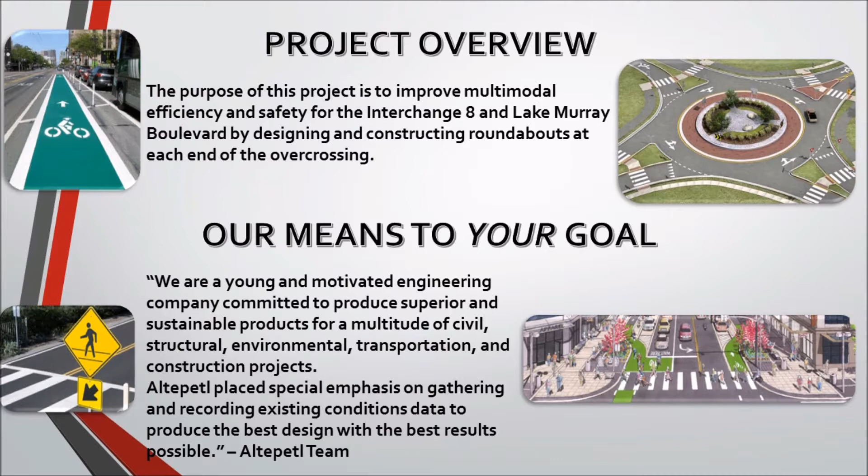The objective of this project, as stated in the request for proposal, was to improve multimodal efficiency and safety for the Interstate 8 and Lake Murray Boulevard interchange and the adjacent roadways by designing and constructing roundabouts at each end of the bridge. It was also to reconfigure the geometry of the approaches and departures of the adjacent roadways.

The Altepetl team prides itself on having one of the most experienced groups of individuals that one can find at this level. These individuals are Joshua Woodruff, our transportation engineer and resident CAD wizard, Michael Singley, who tackled the project's hydraulics and hydrology matters, David Fish, myself. Not only did I act as the project manager, I also took on all of the structural and geotechnical engineering needs of the project. Daniel Connor handled the scheduling and construction phasing of the project.

Leonardo Flores provided the traffic analysis and determined the feasibility of our various alternatives. And Corey Sabota took on the environmental concerns introduced by the project. Now that you know a little bit about who we are, I'll let each one of these guys tell you about how they took on the different aspects of the project.

Hello, my name is Joshua Woodruff, the roadway design engineer and CAD specialist. The existing site shown here is located off Interstate 8 in La Mesa at the 70th Street, Lake Murray Boulevard exit. The site includes 3 intersections, 2 of which are signal controlled and 1 is stop controlled.

The 70th Street Alvarado Road and the Lake Murray Boulevard Connecticut Avenue intersections are signal controlled. The stop controlled intersection is located on Parkway Drive at the I-8 West on-ramp off-ramp. There are no bicycle paths located on the site, and pedestrian crossings are long and unsafe.

The existing traffic conditions that contributed to the geometric design will be discussed by the transportation engineer. As the roadway design engineer, I work directly with the transportation, structural, geotechnical, hydraulics, and environmental engineers to produce a fluid and appropriate geometric design. This design had to improve vehicle flow and pedestrian and bicycle safety to create a complete design.

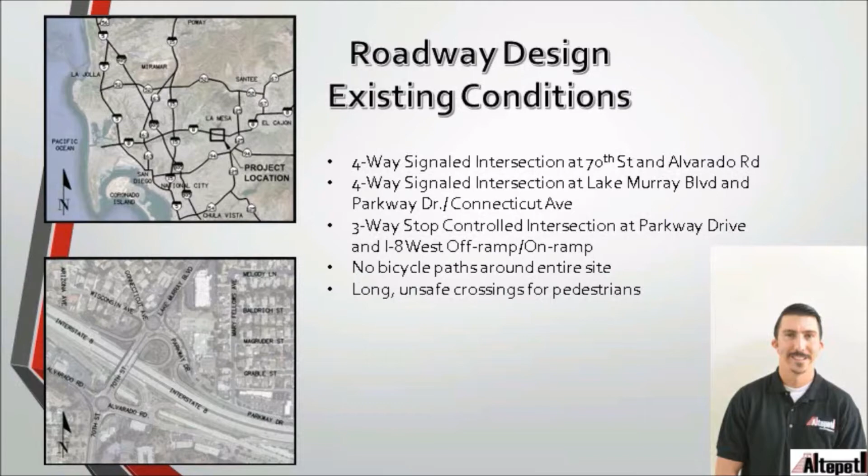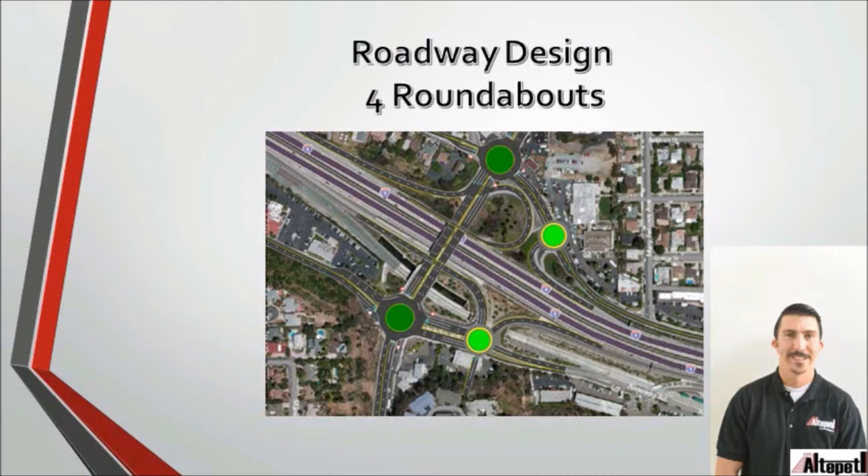A couple designs were analyzed before the current design was used. A prior design entailed 4 roundabouts as shown in this picture. This design wasn't used because the site lacked enough space to design without major grading or the use of retaining walls.

Another alternative design was having a diverging diamond interchange on the bridge between the 2 roundabouts. This is a schematic drawing of the design with the diverging diamond interchange. This design wasn't feasible due to the length of queue and the space needed between the roundabouts.

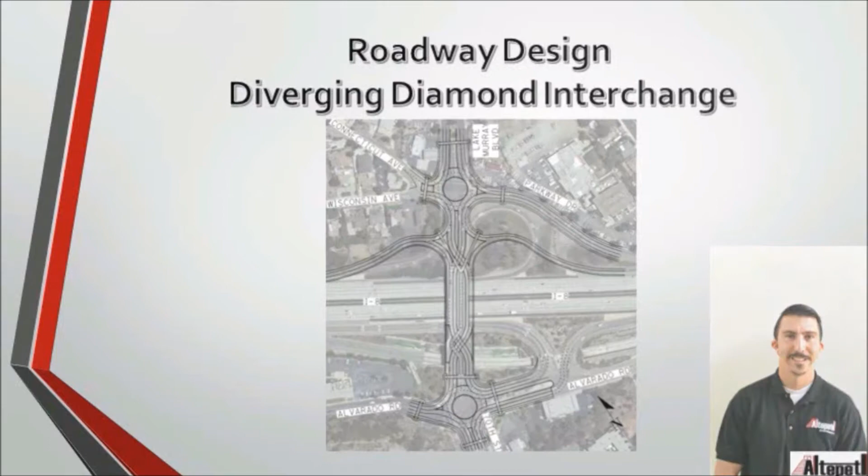To meet the needs of the current and projected vehicular traffic, a 2-lane, 180-foot inscribed circle diameter roundabout was created for the 70th Street, Alvarado Road, and Lake Murray Boulevard Parkway Drive intersections. The lanes inside the roundabout are 15 feet wide, and a WB-67 interstate semi-trailer was used as a design vehicle with a minimum design radius of 45 feet.

A 10-foot concrete truck apron with a rolled curb was added to the island of the roundabout to accommodate the sweep path of the design vehicle. The rolled curb was used to transition to the pavement to prevent the use of daily traffic.

On the southern roundabout, designated right turn lanes were used to accommodate heavy traffic. The stop-controlled intersection on Parkway Drive was replaced with a signal-controlled intersection to improve traffic flow.

Another priority for this site was to create pedestrian and cyclist safety. ADA accessible crosswalks with flashing markers were added to each roundabout. A new 8-foot, 2-way, green-painted bicycle path was added to the west side of the bridge. All lanes on the bridge are 11 feet wide and will be used to slow vehicles down and create a safer environment for the pedestrians and cyclists.

To accommodate the size of the roundabouts, the Shell gas station and the truck and SUV center north of the northern roundabout will need to be purchased. Also, part of the Alvarado Parkway Institute parking lot will need to be purchased for the proposed Parkway Drive alignment.

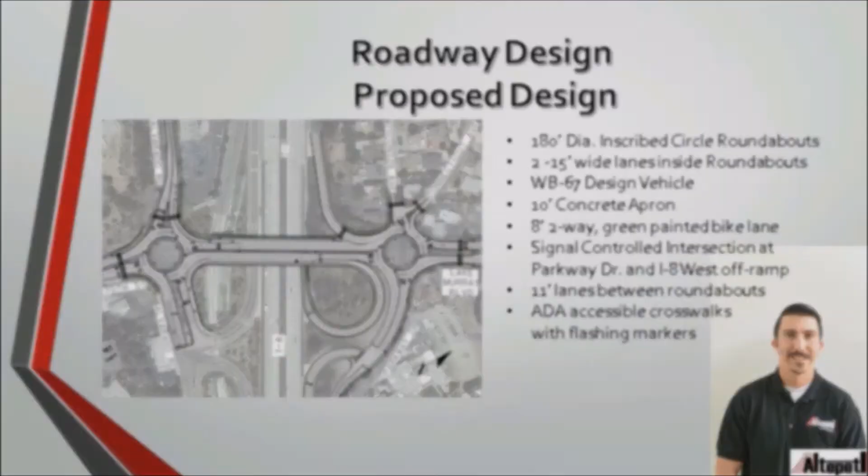My name is Leonardo Flores, the transportation engineer and traffic analyst for this project, and I'll be discussing our traffic analysis findings. In order to produce accurate results, our team of specialists performed traffic counts and lane measurements. The data gathered was used for the baseline volume movements and existing network conditions.

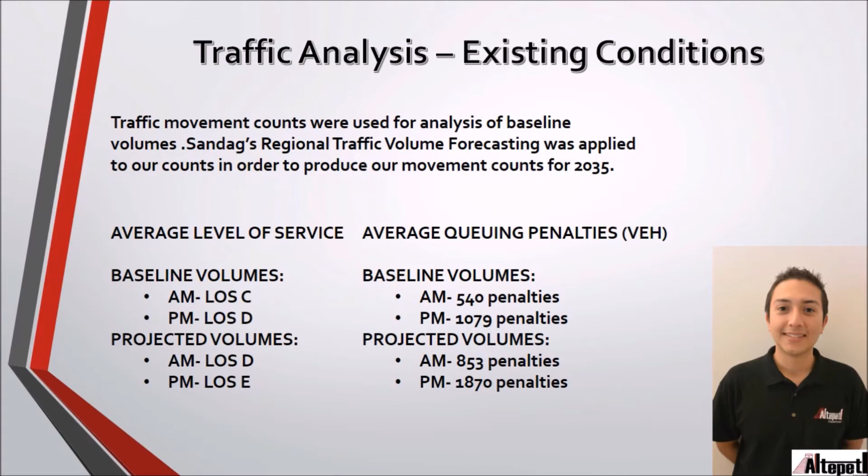Our projected results are based off SANDAG's regional traffic forecasting for the year 2035. As seen on the slide, the existing conditions demonstrated that the worst-case scenario was during the PM peak hour. Our calculations show an average LOS of D for the baseline volumes and an LOS of E for the predicted volumes. As far as queuing, PM peak continues to be the worst-case scenario with over 1,000 vehicle penalties for the baseline and projected volumes. The video being shown is a short simulation of the existing conditions during the worst-case scenario.

As mentioned by Joshua Woodruff, several designs were tested in order to identify the most appropriate design. The chosen design consisted of two roundabouts and a new signalized intersection. The design showed a significant improvement over the existing conditions.

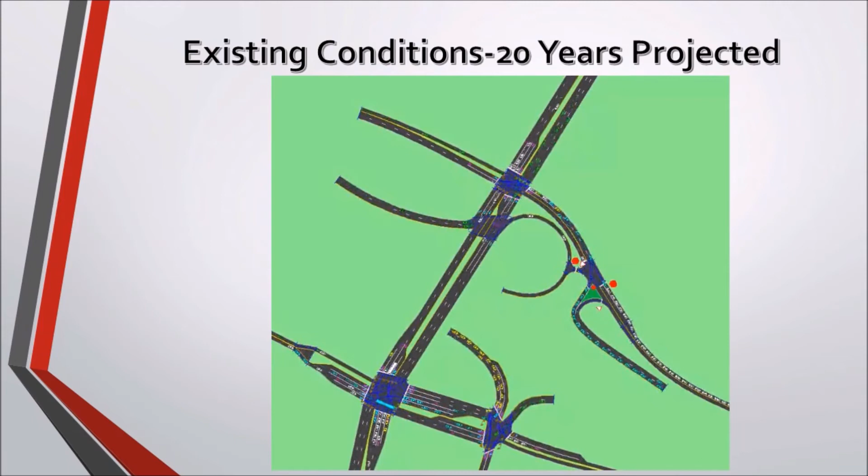As seen on the slide, the proposed conditions demonstrated that the worst-case scenario was during the AM peak hour. Our calculations show an average LOS of B for the baseline volumes and an LOS of C for the projected volumes. As far as queuing, the PM peak becomes the worst-case scenario with 4 and 28 vehicle penalties for the baseline and projected volumes, respectively.

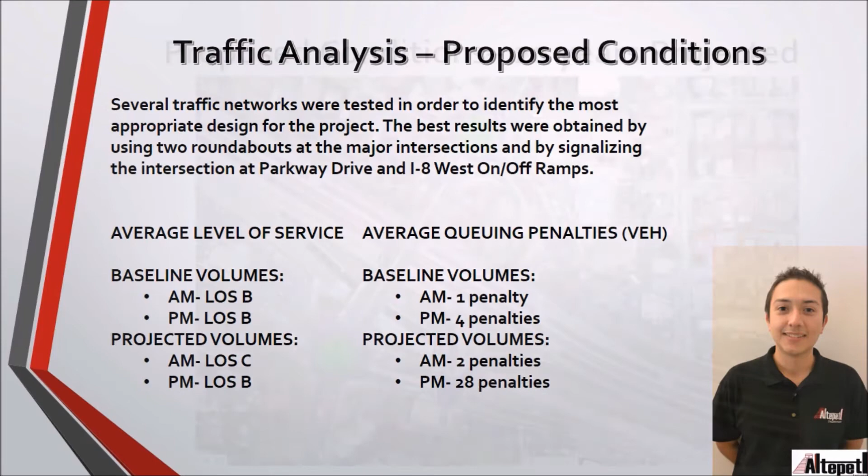The video being shown is a short simulation of the proposed conditions during the worst-case scenario, in which the positive results become apparent.

Meeting the project's objectives of increasing both multimodal efficiency and safety required a new overcrossing structure. There are several differences between these two structures as shown here in this comparison. The structural depth was reduced to 4 feet in order to maintain the existing deck elevations while meeting the HDM standard of 16.5 feet of vertical clearance.

The new structure is a 4-span continuous pre-stressed cast-in-place box girder bridge, as opposed to the steel girder simple span bridge that exists today. The new Lake Murray Boulevard and 70th Street overcrossing is 28 feet wider than its predecessor in order to meet the current and future traffic needs, as well as enable us to introduce complete street concepts.

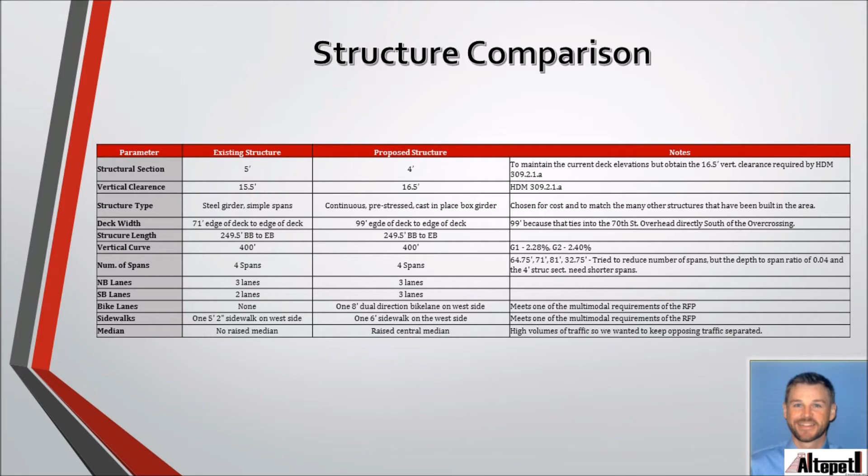As depicted here, the overcrossing will be constructed in 2 stages and have a 5.5-foot closure pour connecting the two. This staged approach will enable us to maintain traffic continuity during construction.

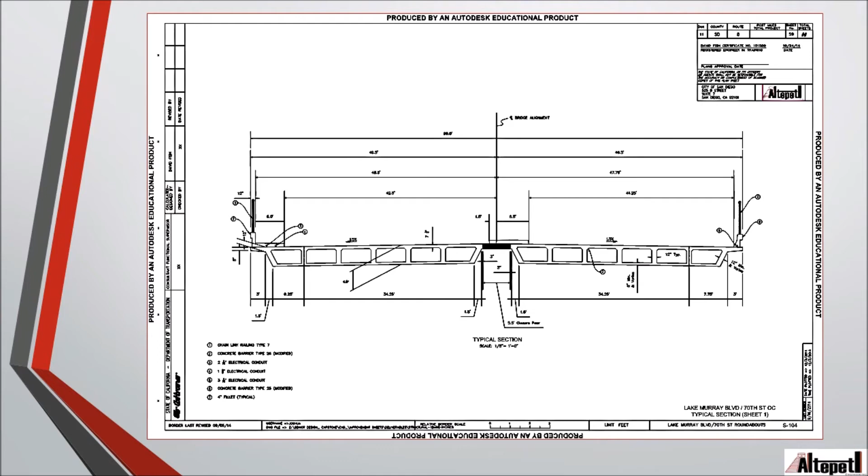CT Bridge and VBent software were both used to analyze the superstructure and bents respectively, enabling me to accurately determine and detail the reinforcement needs.

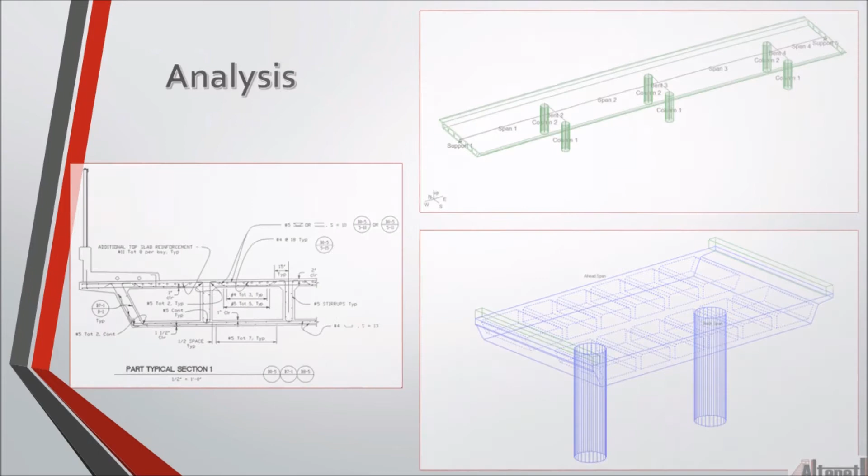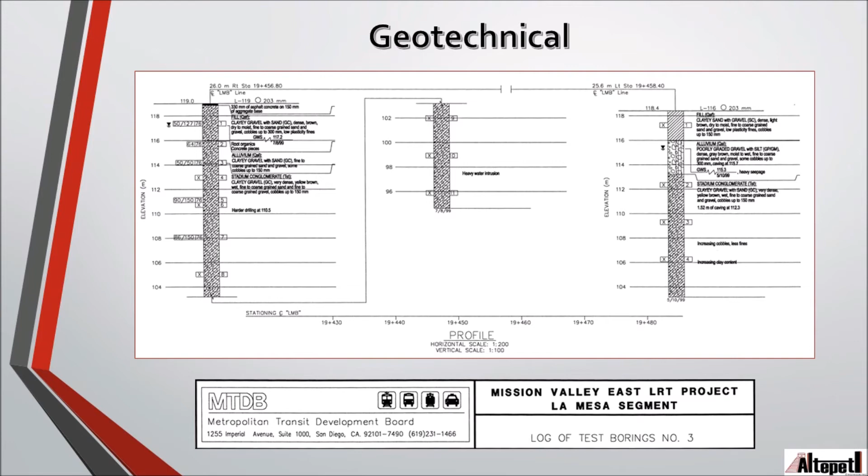As for the geotechnical analysis, we were able to find a log of test borings in a recent set of as-builts. The borings from the Mission Valley East Light Rail Transit project were taken from the same site as our project, and therefore provided us the much needed information to classify and analyze the soil.

This analysis led to these foundation recommendations, and since I am the structural engineer, I decided to use these recommendations with relatively little hesitation.

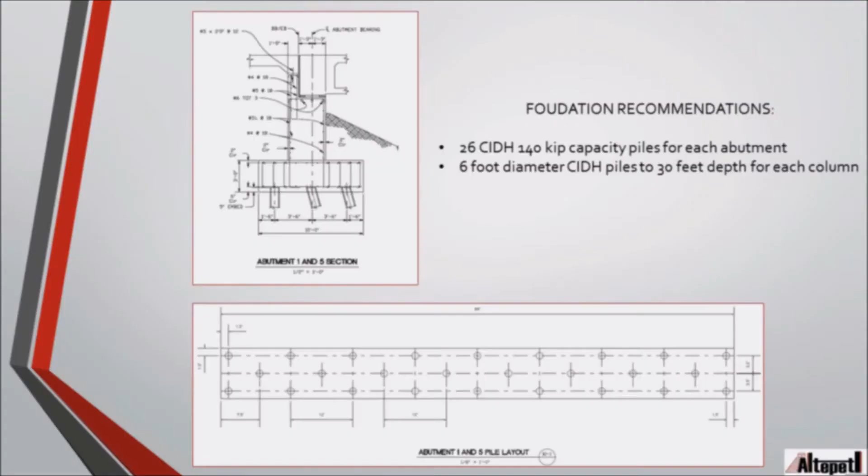Due to the vicinity encompassed by the project at hand, the ability to properly phase the construction process was vital to ensure all deadlines were met without delay. The project will span a 14-month duration at a cost of $17.2 million, with all costs being derived from the Caltrans bid numbers for District 8.

The first phase of construction will span a 5-month duration and consist of the demolition and reconstruction of the western section of the Lake Murray Boulevard 70th Street Bridge, along with minor median replacements at the intersection of 70th Street and Alvarado Road.

The second phase of construction will encompass the demolition and reconstruction of the eastern section of the bridge, lasting a duration of 5 months. With the completion of the western section accomplished in Phase 1, traffic will be temporarily rerouted to this section to allow for a continuous flow throughout the construction process.

Phase 3 will hold a duration of 2 months and will address sidewalk demolition and replacement activities in both the northern and southern intersections, as well as vegetation removal and grading required to effectively accommodate roundabout installation. Spanning 2 months, Phase 4 of construction will consist of the installation of both the northern and southern roundabouts, along with the construction of the center median that spans the Lake Murray Boulevard 70th Street Bridge.

To further complement the activities outlined in both the demolition plan and traffic control plan, a water pollution control program was drafted to ensure that all stormwater pollutants caused by construction are properly monitored and contained throughout the project.

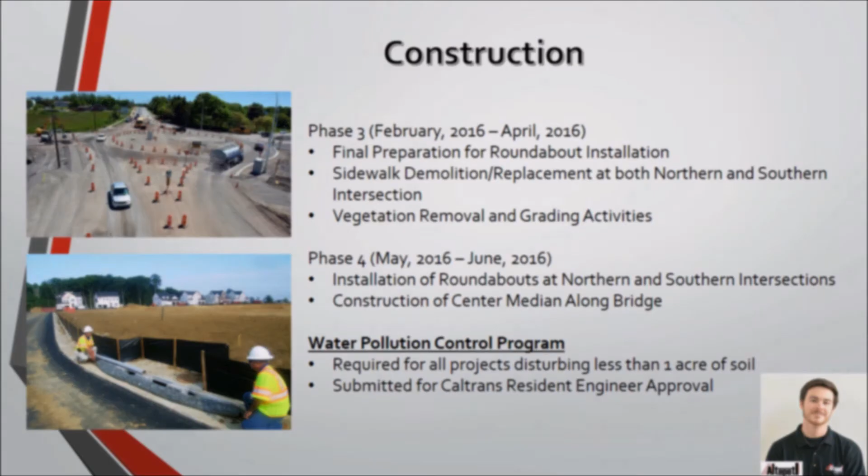In considering hydrology and hydraulics management for this project, the increase in road surface area from the existing to the proposed condition is slightly less than 1 acre, which results in runoff increases to the 2-year, 10-year, and 100-year storm events.

There are 8 drainage management areas or drainage basins identified to manage runoff, which will be considered over the course of the project. The basins drain to 5 points of compliance or POCs, where surface flow converges and becomes hydraulic flow in the storm drain system leading to the Alvarado Channel, which runs through the project site.

One of these POCs was reduced in flow. 2 others will be increased only slightly and less than 10%, which is considered negligible, therefore flow mitigation is not necessary. Both of these POCs have adequate existing water quality treatment to meet CASQA BMP standards.

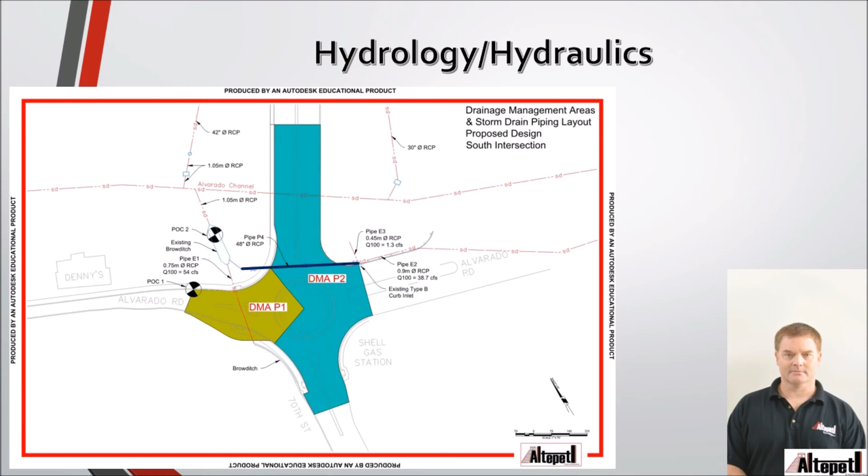However, one storm drain pipe will have to be sized up from 0.9 meters to 48 inches to prevent pressurized pipe flow. The 2 remaining POCs exhibit an increase in flow of greater than 10%, and their runoff must be managed. The flow increase will be handled by the use of 2 extended detention basins.

These basins are fed through weir boxes, which divert runoff flow in excess of the existing runoff into a basin, while allowing flow equal to or less than the existing amount into the storm drain system via an orifice in the weir structure. Water quality of these basins will be addressed through the use of a continuous deflective separation, or CDS units, sized to effectively clean water at or above the expected flow rate into the POC.

Additionally, 2 curb inlets located in the northern intersection must be relocated since the curb in the proposed surface will be pushed back. The new location of these curb inlets will be accompanied with new piping to tie them into the existing storm drain system.

According to the California Environmental Quality Act, a mitigated negative declaration was required for this project. Some potential areas of concern associated with the project are air quality, greenhouse gases, noise, water quality, and transportation. With mitigation, the overall impacts of these areas will be considered less than significant.

The project itself will be improving traffic efficiency and minimizing vehicle idling time, therefore significantly reducing most of the current environmental impacts. During demolition and construction is when the greatest impacts of the project will occur. To reduce these, many BMPs will be utilized to minimize these impacts as much as possible.

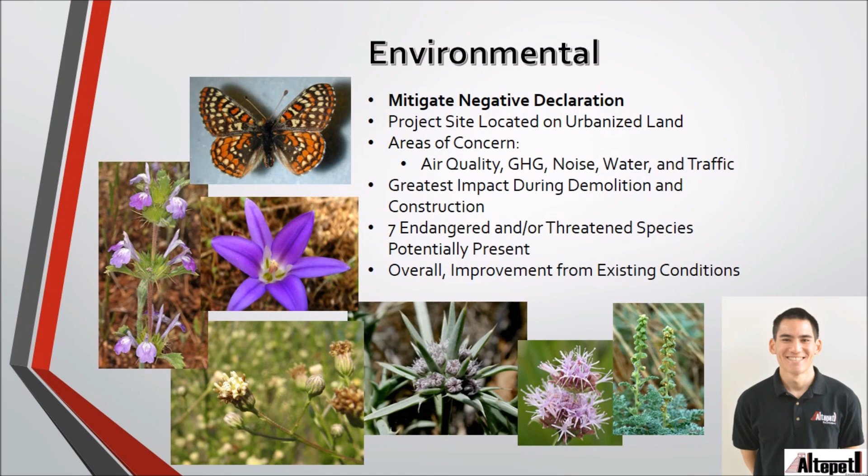There are currently 7 endangered and/or threatened species that are potentially present on the site, but due to current urbanization, the site is not a very suitable habitat for any of these species, therefore having no effect on them. Overall, the project will be more beneficial to the environment than the current conditions.